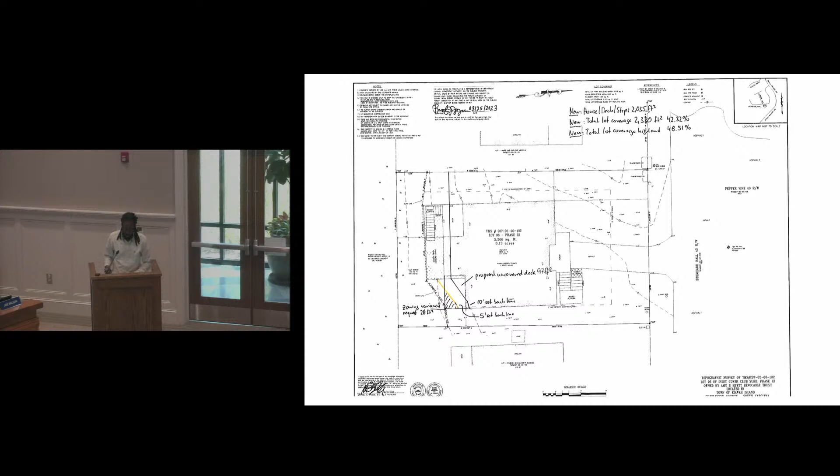Staff did conduct a site visit, and the following determinations have been made according to this particular property, and this is all in accordance with the approval criteria outlined.

The variance approval criteria, beginning with criteria A, that there may be extraordinary and exceptional conditions pertaining to this property, and that's due to the movement of the OCRM critical line over time and the existing non-conforming status of the current structure on the site.

This site was constructed in 1983 per Charleston County records. The applicant has stated in their letter of intent that the OCRM critical line migrated what appears to be nearly 50 feet towards the property over a 30-year period.

The second criteria, approval criteria B: these conditions may be unique to the subject property and may not generally apply to other properties in the vicinity. The subject property is located in the R2O residential overlay. Adjacent properties also fall under that same zoning district within the Inlet Cove neighborhood.

The subject property is adjacent to a marsh at the south. Across Beachwalker, the property is zoned R3/C, residential/commercial, and existing structures in the vicinity may or may not have similar encroachments.

The applicant has stated in their letter of intent that other properties on Belmeade Hall are set several feet further back from the marsh, while the OCRM is known to migrate. A migration of over 50 feet within a 30-year period is not something one would expect to be a normal occurrence.

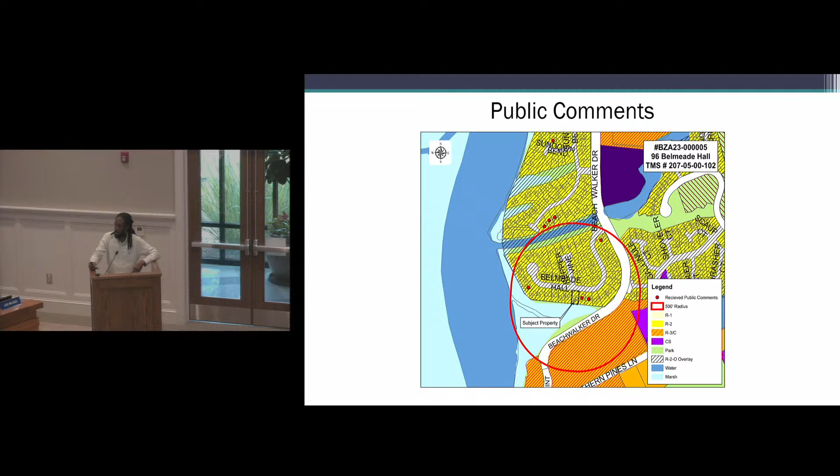As part of your materials received, I did highlight an overlay of the zoning map showing the 500-foot radius, where the public comments received represent the red dots on this particular map. Just a point of clarification, you may see some outside of that circle. That doesn't mean those comments were not inside the radius. If that red line touches a portion of that property, that was part of the 500-foot radius for the notification requirements. So with that, that concludes my staff review for this subject property.

Thank you, John. Questions from the board for John? Hearing none, I'll call on the applicant.

I believe it's Mr. Leckler.

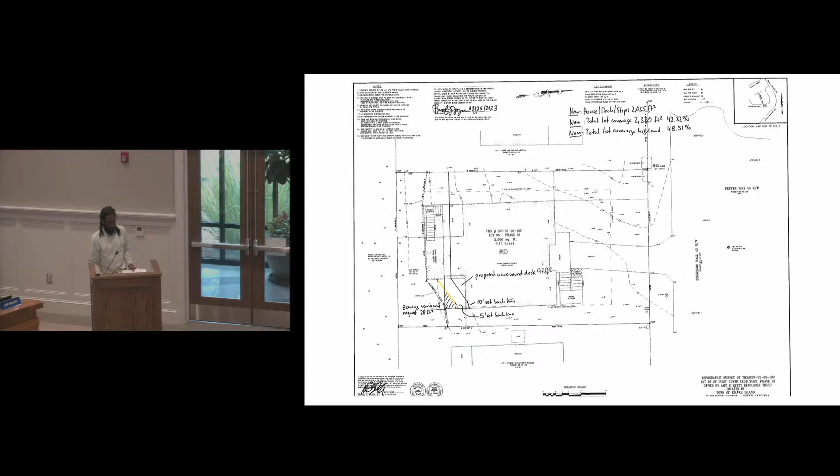I'd just like to read a letter. The homeowners, actually, they are out of the country, and she sent that to me just to read this to the board. To whom it may concern, we are writing as the owners of 96 Belmeade Hall.

As you know, we have applied for a variance in order to add a small uncovered porch, as have many Inlet Cove neighbors, including next door to us. This would allow symmetry outside the home and an additional small porch to the existing structure. This porch will have minimal impact to the surrounding wildlife and marsh behind our home. We deeply value the wildlife on Kiawah.

It is one of the reasons that we purchased on the island in the first place. We love nature and we envision many happy hours spent sitting outside and watching the birds, the kayakers on the river, and listening to the sounds of insects and other creatures that live behind our home.

We respect the environmental safeguards put in place to avoid building too close to the marsh. That being said, we do not feel that this 28 square feet of elevated uncovered decking will have a detrimental effect in any way on the surrounding wildlife. We will continue to be very respectful of the surrounding environment, and our renovation will include updates inside and out on the home that will improve our cottage's efficiency and hopefully will result in a smaller environmental impact overall.

We know that there have been several variances granted already in the Inlet Cove to enable staircases on the sides of cottages and significant additions to cottages themselves. The precedent in this regard has already been set. We wish we could be here in person to meet you and plead our case, but several family conflicts arose on this particular day. Thank you very much in advance for your time and consideration. Sincerely, Amy and Bright Hyatt, 96 Belmeade Hall.

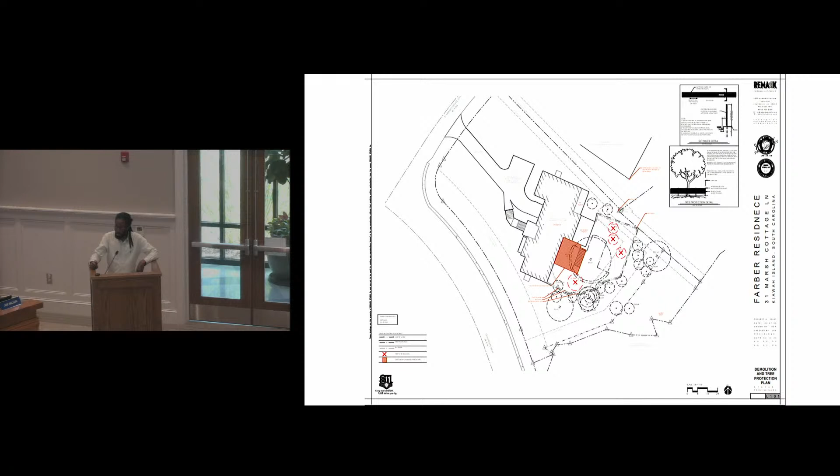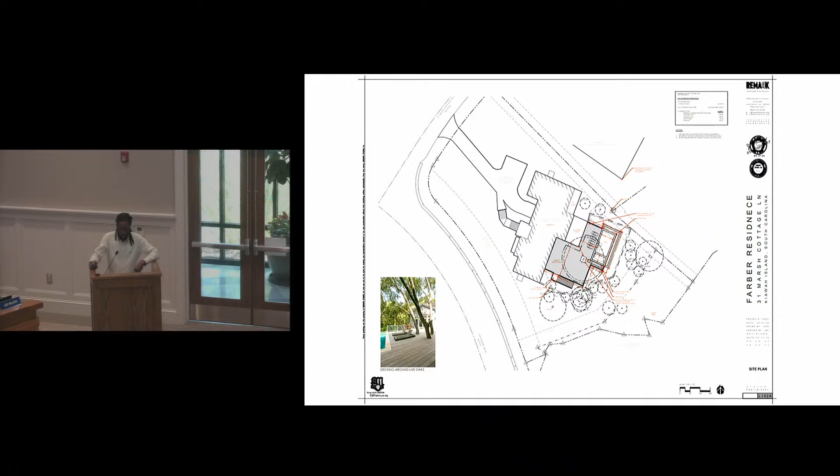Proposed plans of the existing deck be removed. And the proposed features here of the modified deck and pool addition with the preservation of the 31-inch live oak at the center there. Staff will now go and do a review of the findings based upon the staff visit.

There may be extraordinary and exceptional conditions pertaining to the property, and that's due to the size and location of the existing mature trees on the site, the proximity to critical area at the rear of the site, and the double frontage of the subject property that's adjacent to Marsh Cottage as well as Governors, which includes a 40-foot setback off of Governors Drive. This subject property also contains several mature trees, including live oaks at the rear of the property. And there's a 31-inch live oak at the rear of the existing deck.

And the applicant has stated in their materials that there's a grand oak of 31 inches at the rear, which creates an extraordinary condition that has guided the design and the location of this raised pool and deck. And the design and constructability of the proposed design is in direct response to its natural and irreplaceable element.

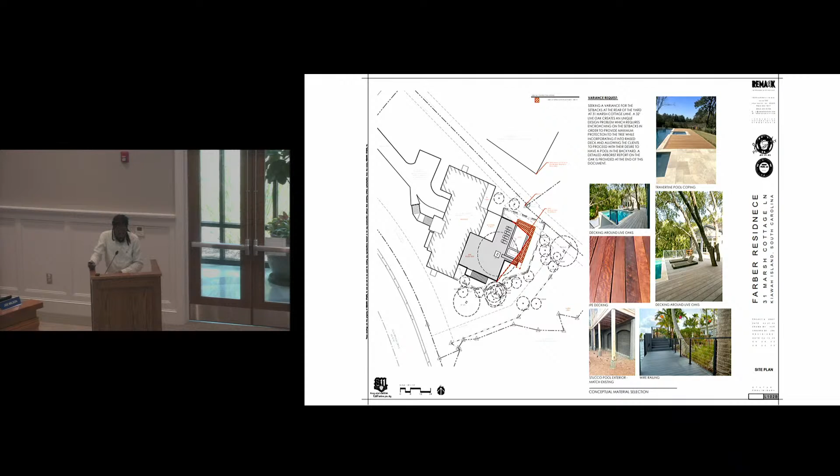When it comes to criteria B, the conditions may be unique to the subject property and may not generally apply to other properties in the vicinity. The subject property is located within an R2 residential zoning district and is legally non-conforming. With regards to setbacks, the adjacent properties to the northeast and west are also located in that R2 zoning district, and the adjacent properties across Governors is located in the R1 residential zoning district.

This subject property is adjacent to critical area to the south and existing structures that may have or may not have similar encroachments based on the current setback standards. The applicant has outlined within their letter of intent that the existence of a grand live oak so close to the main residence and exterior living space is a unique condition that does not apply to other properties.

Looking at criteria C, the application of the ordinance to this property, 31 Marsh Cottage Lane, would prohibit the construction of the proposed deck and pool addition, as the structure does encroach into the required 15-foot side setback as well as the required 30-foot rear setback. However, it does not unreasonably restrict the utilization of the property.

The applicant has stated in their materials that due to the location of the grand oak in the center of the rear yard, it impacts the ability for owners to utilize the backyard and exterior living space. Given the detailed arborist report, which details the nature and habitat of the tree, the design and construction of the proposed plan responds to these unique conditions. The root plate of the grand live oak will remain undisturbed, and a structural floating beam will allow for minimal invasion on the root zone.

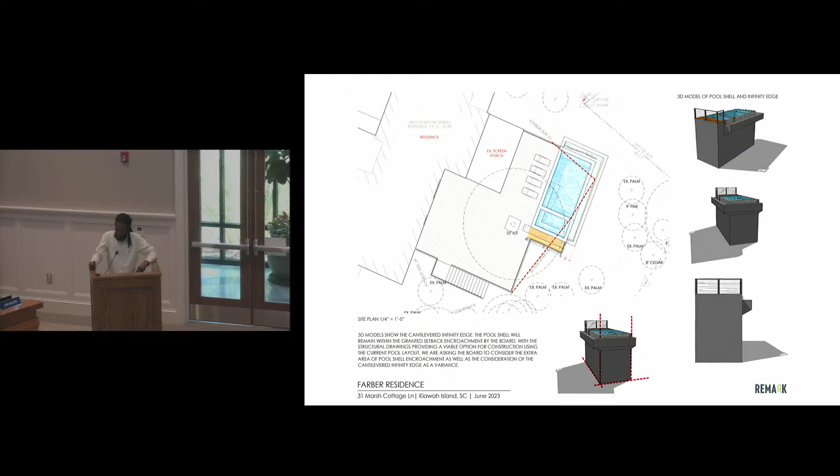The areas impacted by the construction will be hand dug to ensure viability and protection of the location of the underground root system. Looking at criteria D, the authorization of this variance may not be of substantial detriment to adjacent properties or the public good.

A portion of the existing single-family residence encroaches into the required side setbacks. That subject property is legally non-conforming with regards to setbacks, which the existing structure does encroach into. The proposed pool and deck suggest an encroachment of 180 square feet, resulting in 31.3% lot coverage.

The applicant has stated in their materials that neighboring properties will not be affected by the granting of this variance. Preserving the tree and creating a plan to work around it maintains the character of the district. 31 Marsh Cottage Lane is located on a corner lot, and the property backs up to the marsh.

Working in coordination with the Kiawah Island Architectural Review Board, a planting plan has been developed to ensure proper screening on two sides of the property. This ensures that the exterior movement and exterior improvements will not be visible to the public realm.

The requested variance is only for 180 square feet, with portions of that being for a cantilever trough that functions as part of the infinity edge.

Looking at criteria E, the granting of this variance would not allow the establishment of a use not otherwise permitted in this zoning district, extend physically a non-conforming use of land, or extend the zoning district boundaries. The applicant has stated in their materials this proposed plan will not be in conflict with the above statement, as they are seeking a 180 square foot encroachment for a raised pool and deck.

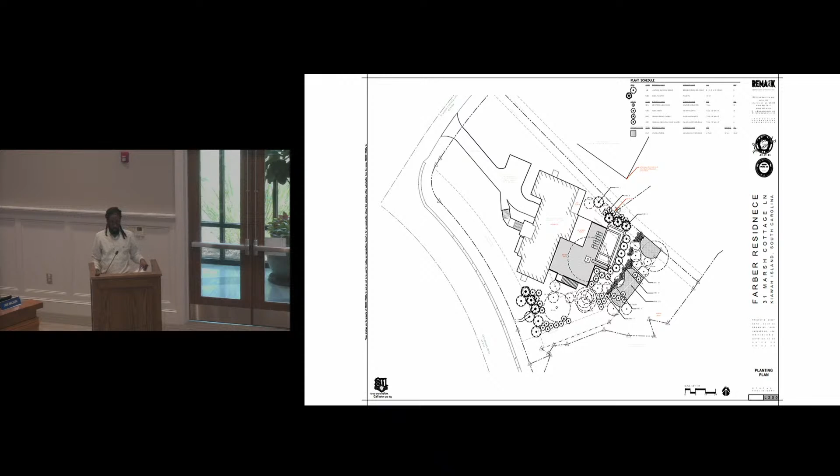Good afternoon, everyone. My name is Taylor Femmel. I'm the landscape architect for this project, part of Remark Studio. We're in downtown Charleston. Mr. Frederick Farber is also here as well. He may choose to speak after me, but I would like to reiterate some of the talking points that John Taylor already went through.

We are requesting 180 square feet total. I'd like to break down what that square footage actually comes out to: 17 square feet is decking, 50 square feet is pool and coping, and the other 113 square feet is a cantilevered edge for the infinity edge, which will have no ground disturbance. It'll be elevated and act much like a roof structure.

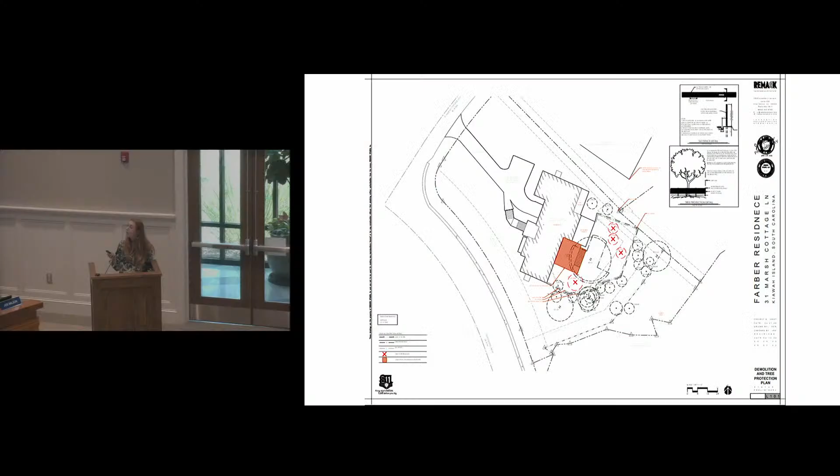As was already reiterated by Mr. Taylor, we have put together an extensive planting plan that'll be screening the proposed improvements from the public realm as well as the neighboring properties. I'd also like to reiterate that we are proposing the new improvements are 31.3% of coverage allowable for the site, which is below the maximum 33% coverage allowed.

I'd also like to touch upon, there's been a lengthy design process regarding constructability, construction means and methods, in order to preserve and guarantee the integrity of the tree. We've engaged myself, landscape architects, arborists, engineers, and put forth ultimately the request to preserve this tree.

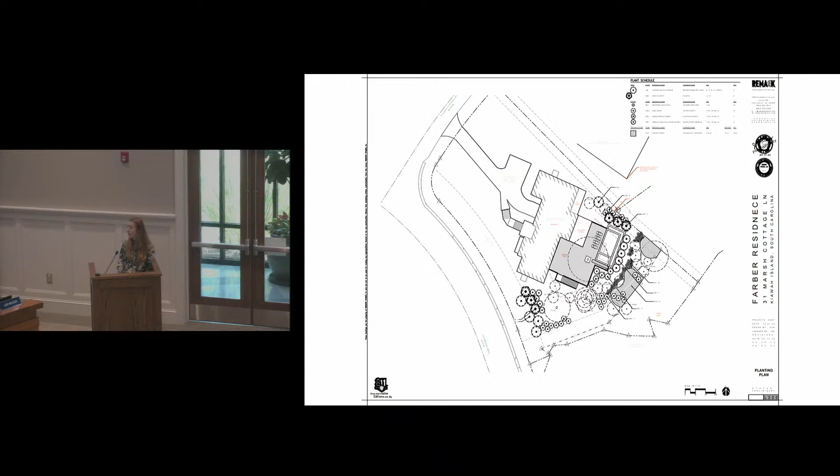And finally, we've received support from the Kiawah ARB for the proposed improvements. We've corresponded with them as well and have come to this plan, which takes into consideration floating beams and really preservation of the root plate of the tree. Thank you.

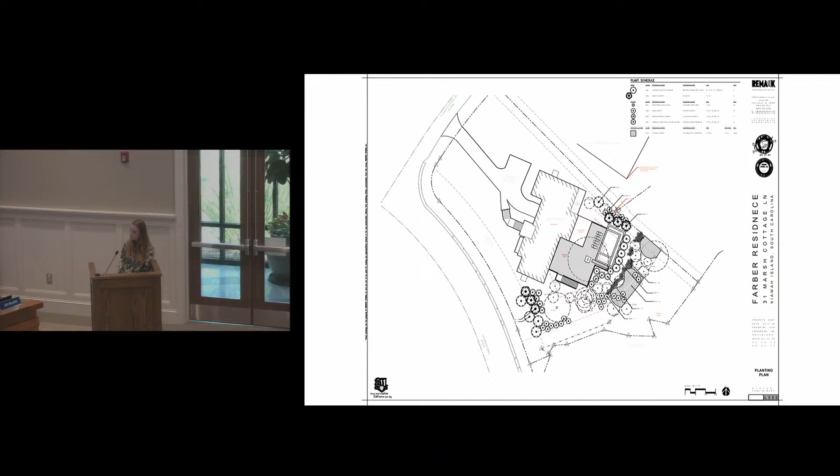Questions? I have a question. When I walked the back of the property, I think it's probably the furthest edge, the furthest tip of the edge of the pool, the closest one to the lines, to the neighboring, the plan north? Sorry, yes, right. Let me use the pointer here. This very edge one, which one is it? Sorry, I'm going to try my best here. Right here? Yes. Okay, yes.

So when I walked that property, my only concern was it looked like that area where that part of the pool was going to go was already very wet. My question is more about the integrity of the pool, because you're by a lagoon and you do get some water. I just want to verify that it had all been taken into consideration with the building of this, because it was pretty wet. Absolutely, we have taken that into consideration, and we're also in the process of engaging a geotech, so they will be drilling the site to make sure our proposed construction means and methods are accurate and the pool can withstand how it's being constructed, if that answers your question.

It does. Okay. What I'm missing here, I understand the preservation of the tree. I'm missing why the preservation of the tree dictates this specific design for this pretty massive deck and pool configuration, such that it needs to require a variance. Sure.

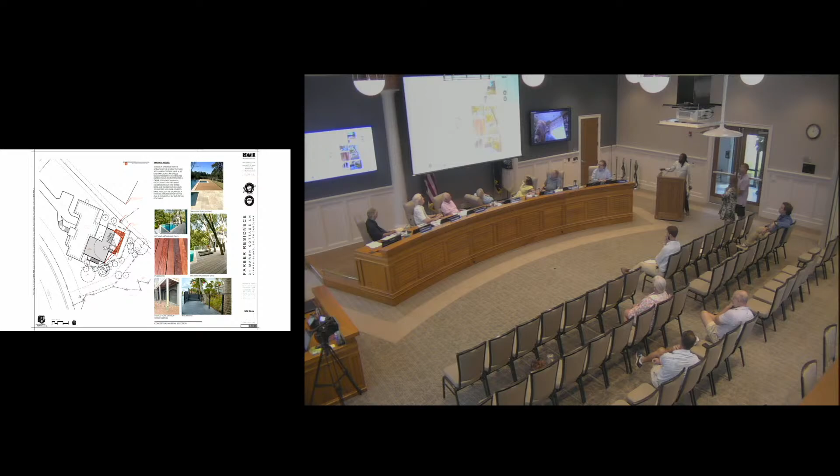Two things have been shared. The existing encroachment — I thought there was an exhibit. Okay, it's not on this slide. The existing encroachment would actually require substantial modifications to occur, essentially to the home, not necessarily the rear deck. So that 600 feet doesn't incorporate the deck, that's the structure, the principal home. I just wanted to clarify that. But it's still totally non-conforming. They've got a lot that can accommodate certain things, so I just wanted to clarify that for the record.

And then the other thing shared earlier — the town does not own that easement there. That's the community association, so I just wanted to clarify that.

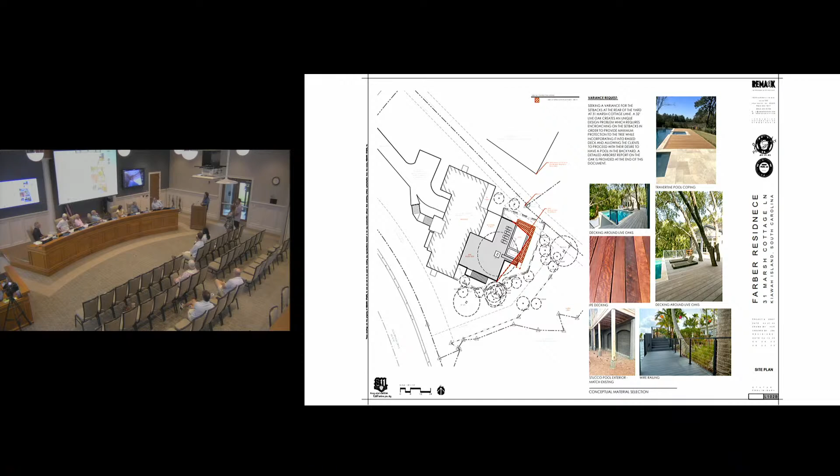The ARB doesn't seem to concern itself with non-conformance in this case, am I correct? I'm asking — does the ARB concern itself with the previous non-conformance of the house when it decides additional non-conformance? Yes, we do, yes we do. So therefore you have no limit to the amount of non-conformance in your decision.

You just decided this is already extant, so we can let them extend now and non-conform. We didn't approve it.

Those two things are, the board didn't see as directly connected, as John was pointing to the front of the house. They're connected, correct, they're built together. If they were improving something around that area that would allow them to make those adjustments in a meaningful, reasonable way, we certainly would ask them to do that.

I just don't see how the ARB can approve increasing the amount of nonconformance of an existing nonconforming structure. I don't understand your reasoning, that's all. I won't argue with you, I'm just making a statement.

John, do you have the exhibit we have? Because I believe you reiterated that's a legal nonconformance. That document we submitted, I think, went back to when the setbacks were created in relation to the year the house was built.

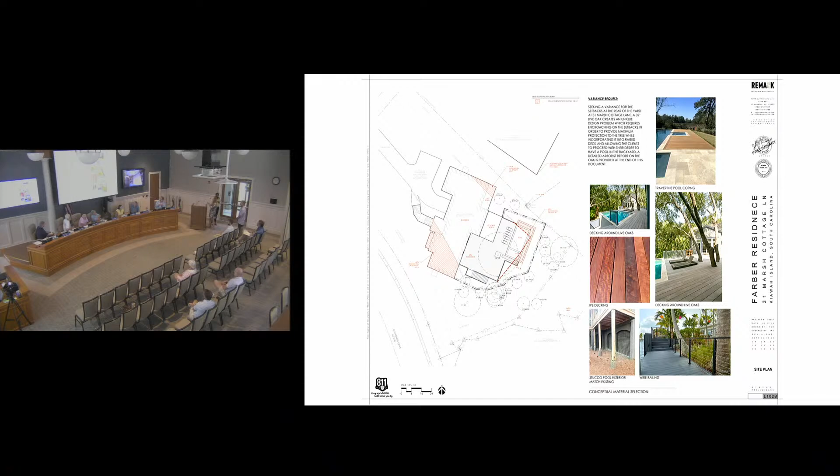My concern is that the 660 feet, they're adding to it. I don't, that's you guys' decision. It's just that simple. My recollection is we don't typically, in legally non-conforming situations, approve making them bigger. We sometimes approve making them smaller.

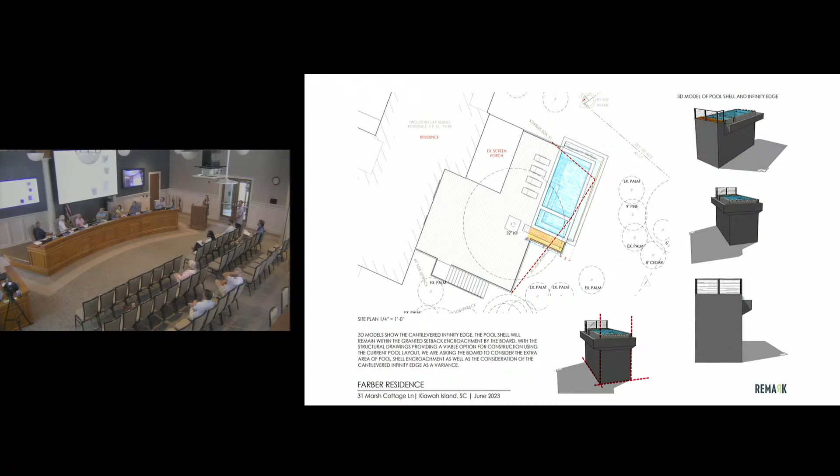Typically we have homeowners who know they have something legally non-conforming, and they give back, or when they add, I understand that can't be done here, John. You're saying it's the house. I understand the house, we're not asking you to do anything with the house. But I'm saying you keep adding, want more, and I think what you're heading into now is out into the marsh.

And that backyard is so low now, it looks like it's been washed out several times over. And adding more in that direction, I think is kind of...

Other comments, questions? Anybody else going to speak to this one? All right, I'd entertain any motions that anyone would care to make.

Go ahead. Okay, I'll make a motion to deny this request. I think it's too much in the wrong place. Is there a second?

Any further discussion? I'd love to see us not deny it, but ask them to come back with a revised plan, if it's possible. Oh, they always have that ability. I think they may do that. Okay, they do that anyway? Okay, good.

I'm sorry John, I always ask the wrong thing. If it was something that you wanted additional information for regarding this, I would suggest that you guys revise your motion as opposed to having a new application come forth, if that was your concern.

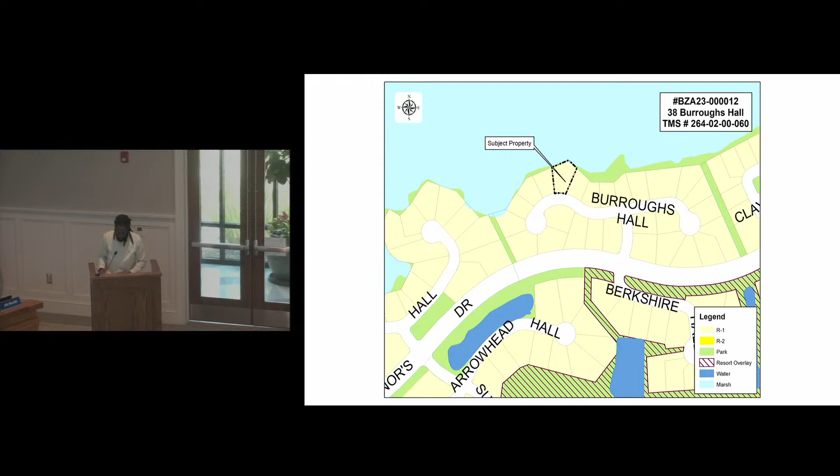This is just located off of Governor's Burroughs Hall. As you can see to the north, the property is adjacent to critical area at the rear. Aerial - here are a few images of the site.

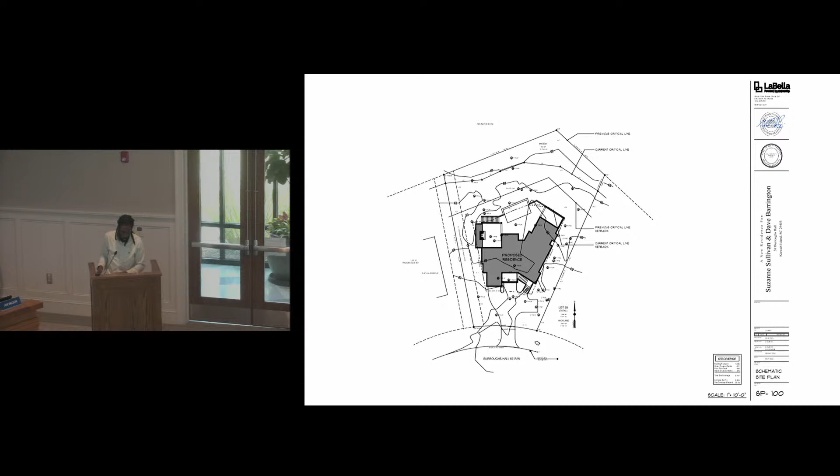Proposed site plan for the subject property, which shows the areas of encroachment. The applicant has also provided within their materials an area reduction of the critical area, areas in cross-hatching. And this shows the areas of encroachment into the dark gray shaded areas, the areas in question regarding today's application. Upon that site visit, staff did conduct a site review in which the following determinations were made according to our approval criteria.

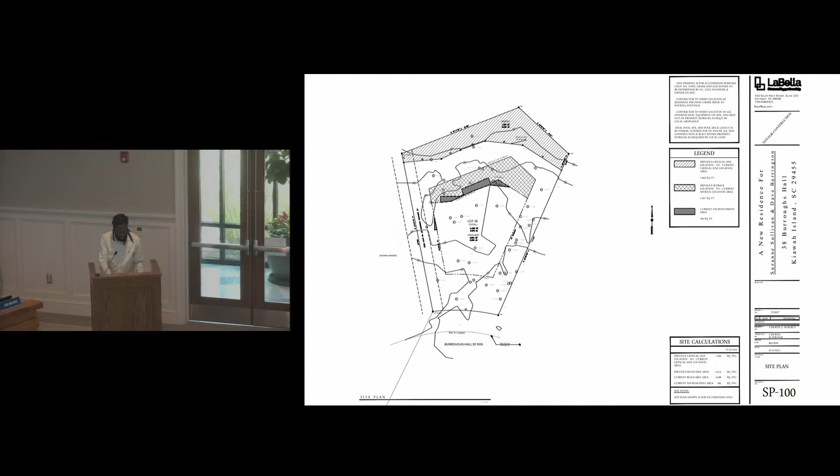Criteria B: these conditions may be unique to the subject property and may not generally apply to other properties in the vicinity. The subject property has decreased in size by approximately 1,993 square feet due to the movement of the critical line, and it also lost approximately 1,207 square feet of buildable area since that last survey. The subject property is zoned R1 residential, and adjacent properties to the south, east, and west are also in that same zoning district. It is adjacent to marsh to the north, and existing structures in the vicinity may or may not have similar encroachments based on what's being proposed to the current setback standards.